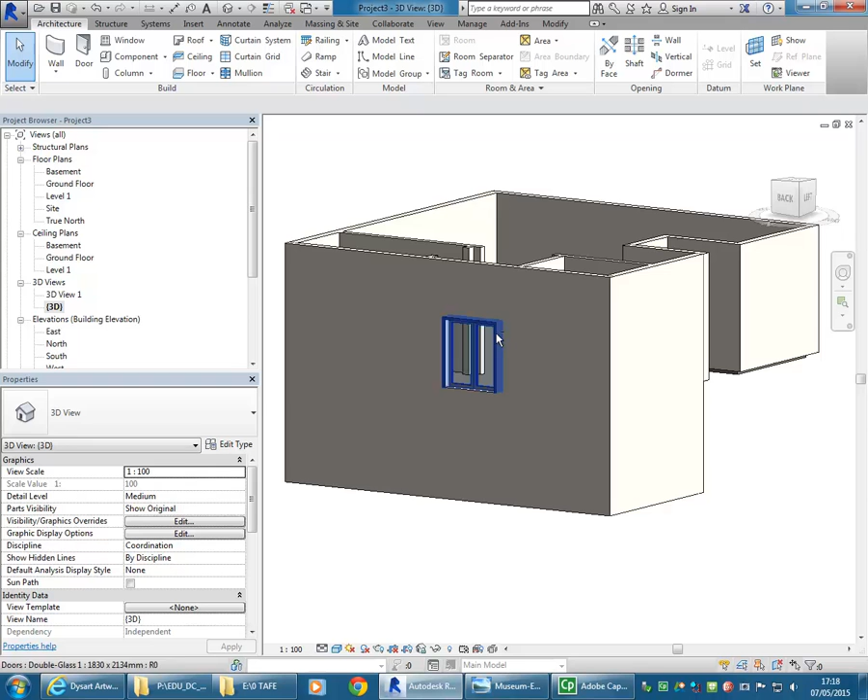I'll quickly put an entry in just to have something to relate to from the outside. Using the door tool, I'll go to load family, and in the doors folder we should have an entry door. It doesn't really matter which one you use, but I'll use the double glass for now. I'm just going to place that roughly in the centre of that entry area there.

Now looking at the building from the outside, we can see fairly clearly where the footpath should be, and that'll be part of our topo surface. You could actually use a floor for that as well - that's a common option, people use floors for lots of these ground surfaces, but it's still good to have a topo surface under it.

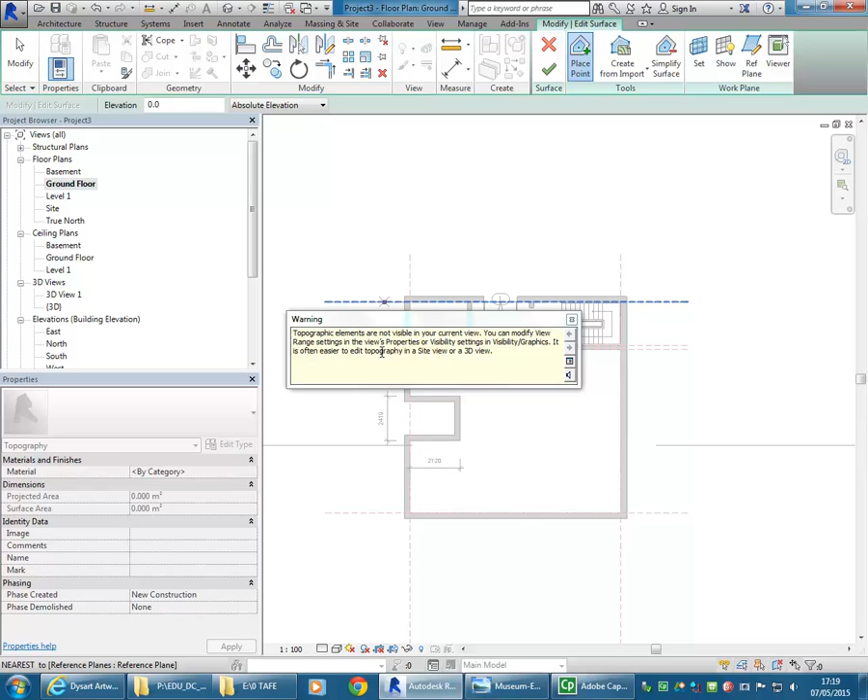Back in the ground floor plan, I'm going to go to the Massing and Site tab, where you'll find the topo surface tool. Now when you do that, you'll get a warning telling you you can't see topography in that view. That's okay, it's just a warning.

So I'm going to switch now to the site plan, where I will be able to see the topo surface. In your floor plans, make sure you're aware that you have a site floor plan already created for you.

Now to create my topo surface, I'm going to go back to place point up on the ribbon. Before I click anywhere, I'm going to change the elevation to -50, just so it's a little bit below the floor that I made. Then I'm going to zoom out so that I can see all of the elevation symbols.

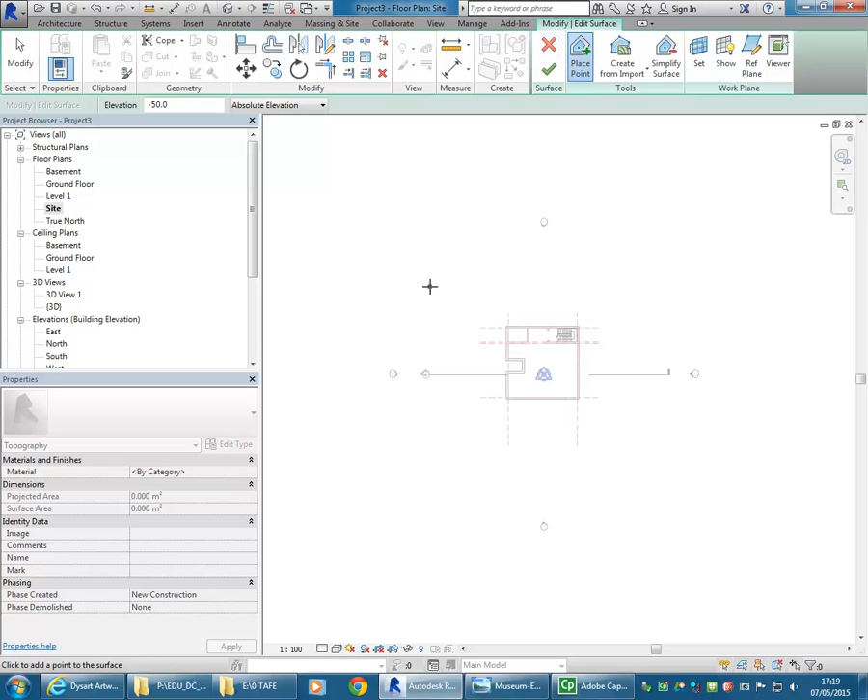Then I'm just going to click 4 points - 1, 2, 3, 4 - that are all outside of those north, south, east and west elevations. That's important because we want the elevations to show a ground line. And so that's it.

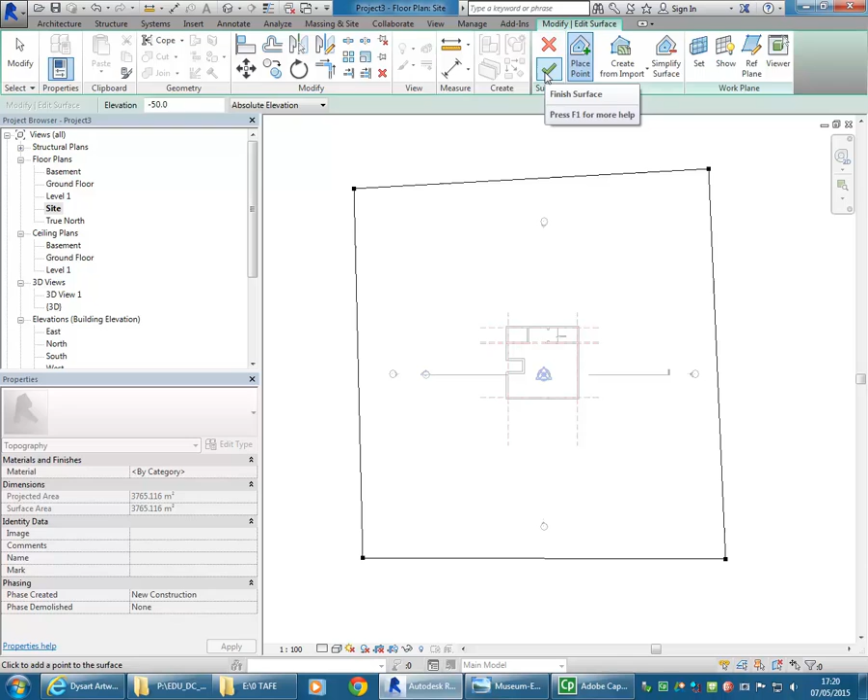I've made the topo surface. I'm going to tick to finish. Then I'm going to open up the section view, section 1, and show you there that it's made my topo surface.

We can see the ground line, but it's also put it through the level below, so I've got to do something extra to bring that level back. In the 3D view we can see as well what's happening.

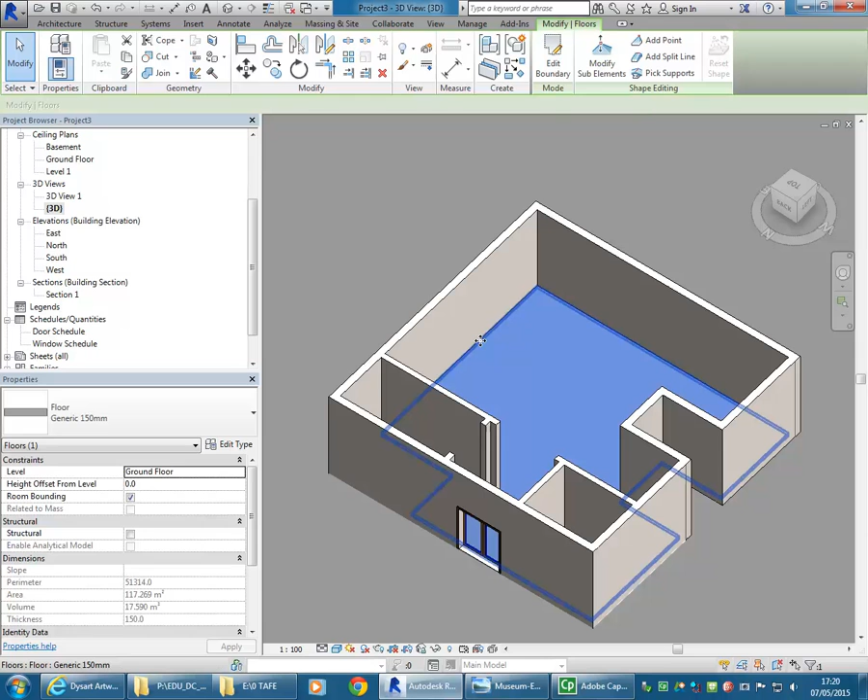It's maybe a little bit unclear because the floor on the inside is the same colour as the topo surface, so I'll make that a different colour. Just going to select that floor, edit type, and I'm going to quickly go in and assign a material to that.

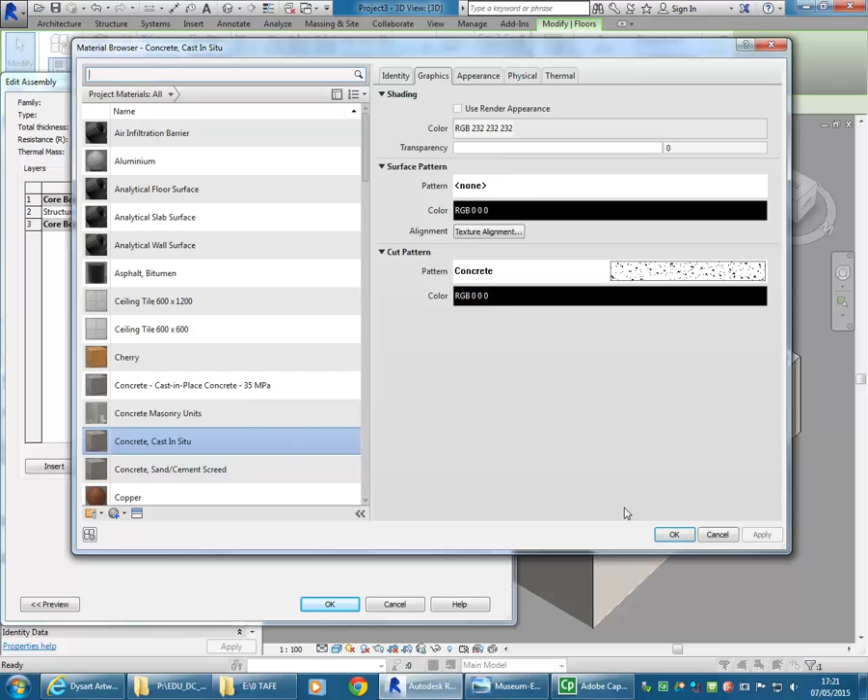I'll just see if the concrete cast in situ is - of course it's a similar grey, so I'll make it a little bit lighter, just to show you that the floor is showing up there and it's not the topo surface that we see inside the building.

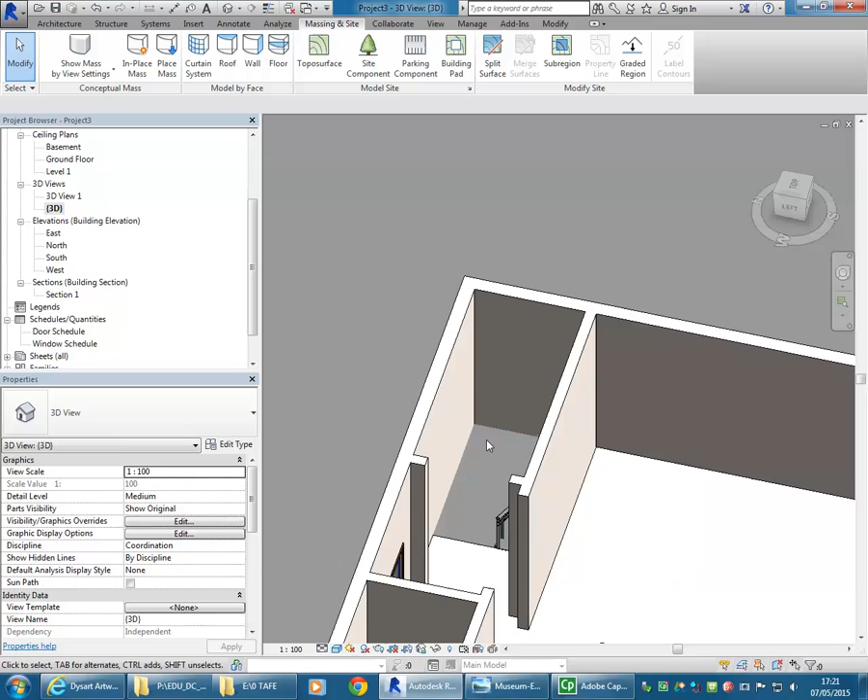But I can guarantee you that - well, you can see actually in the stairwell that the ground is going over that and flooding that entire basement level. So we've got to go now to the basement floor plan.

And you'll see also on the Massing and Site tab you have building pad. So just in the same area as topo surface, that building pad tool is kind of like a floor as well, so we can probably avoid having to add a floor for that level as well for now.

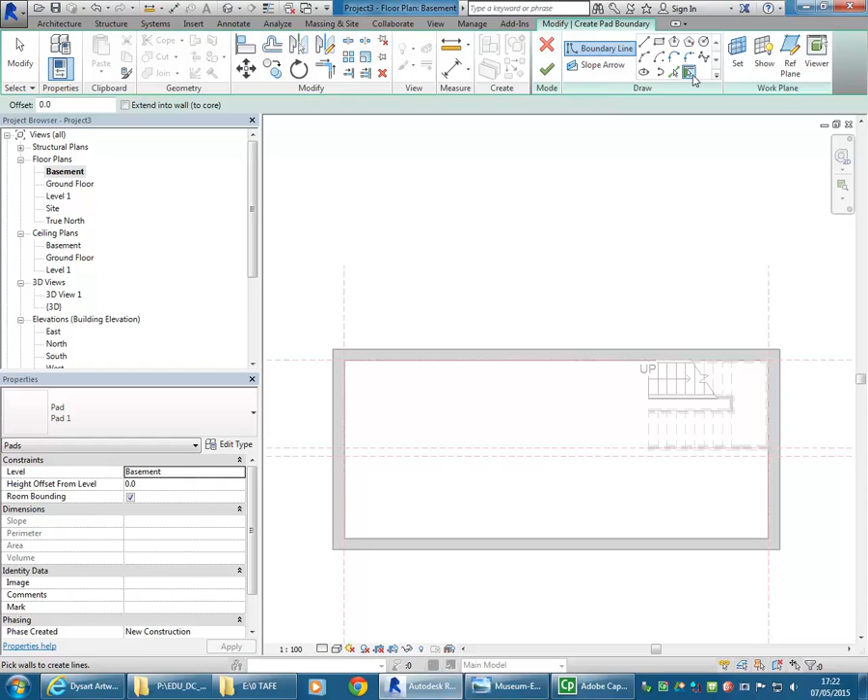So I'm just going to use the rectangle tool. I'm not going to worry about using pick wall - oh no, so I'll use pick walls. Sorry, so yeah, I'm leaving it on pick walls there in the draw panel, and I'm going to pick the outer edge of those 4 walls.

Tick to finish, and now back in my 3D view, you can see that it's showing that basement level again. And if I go into my section view, if it's in the right place, well, we can see the pad there.

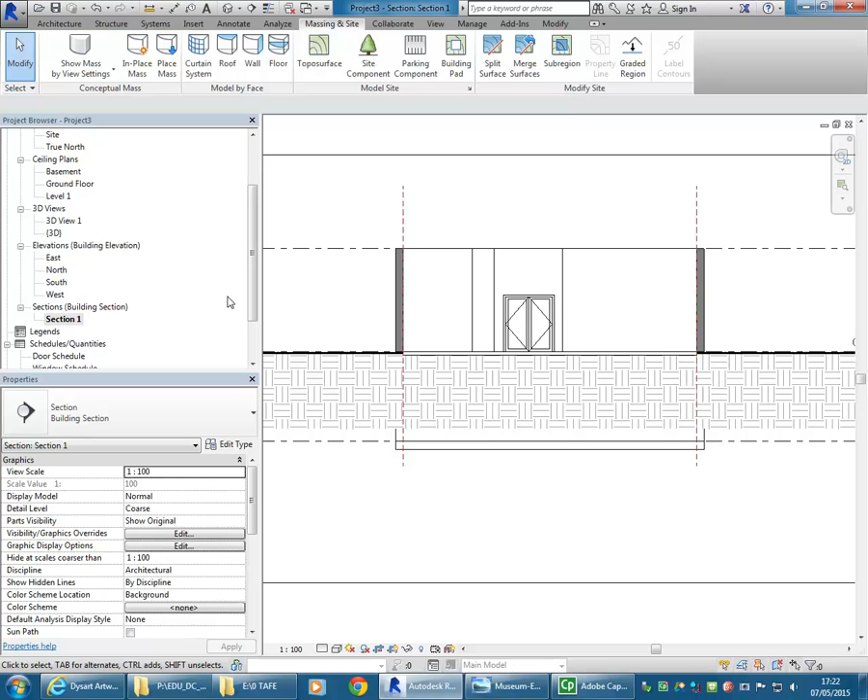But the section is not located all that well, so I'm going to move that section line in the floor plan up to the area where the stairs are, and I might flip it as well so that it's looking the other way.

Now back into section, and I can see really clearly the building pad, but there's still a couple of little things to tweak there, so I'm going to go pretty quickly through this, but you can always look back in the video.

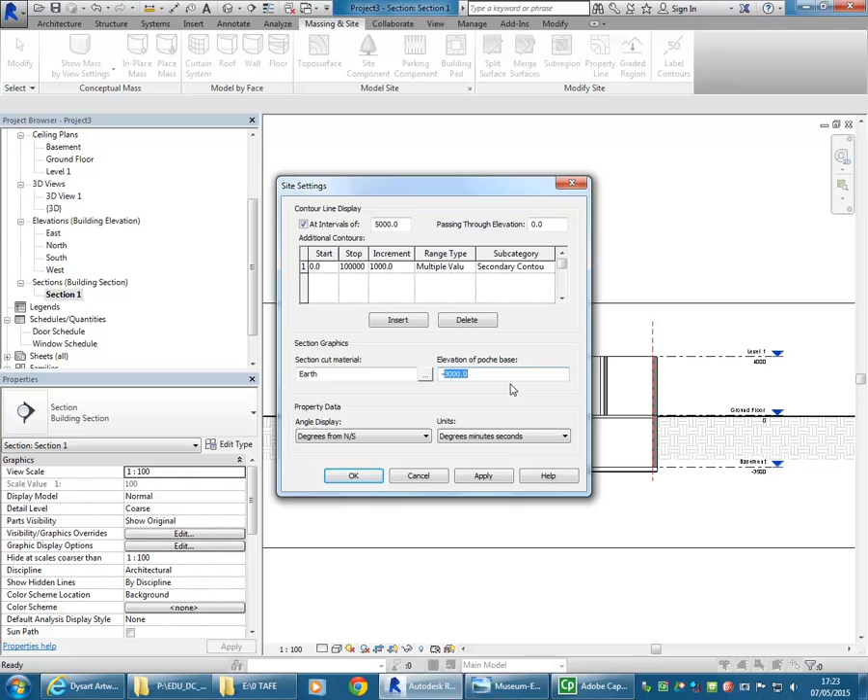The site settings live on that same massing and site panel. There's a little arrow you'll see at the bottom of that model site tab, and there I'm going to bring this elevation of Poche base down to -5,000. So that's brought my ground hatch down below that floor.

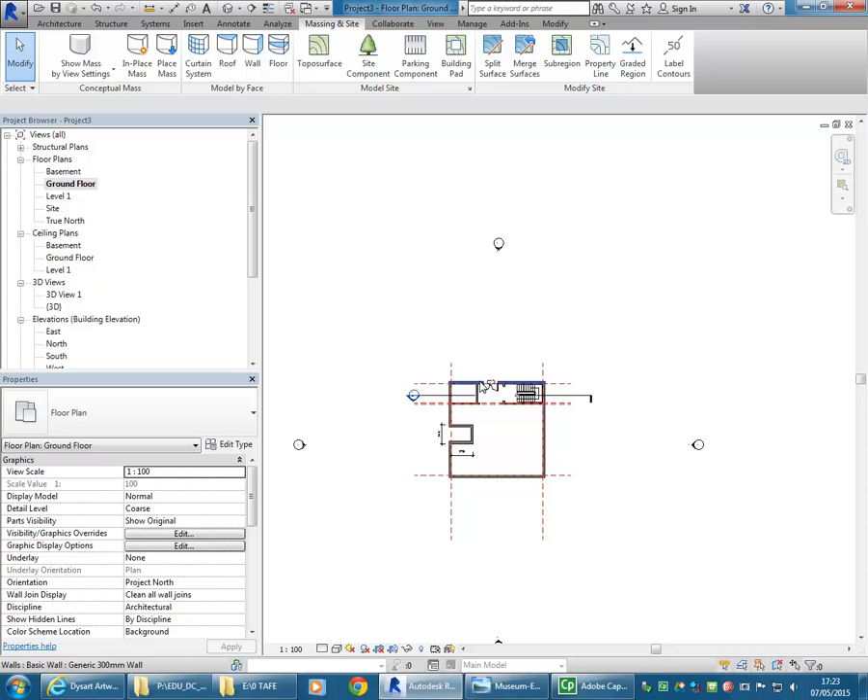Then another little tweak you can do is for the elevation views. So if you remember at the plan view, we can tell that the entry is on the north side. So I'm going to go to my north elevation, and we can see the entry, and that's going to be a useful view. Even though it's an interiors project, you'll still probably want to think about doing a view of that entry using the elevation.

But should elevations show the ground being cut like that? No, definitely not. You want a ground line, but you don't want the ground hatch. So you can turn that off just in this view by selecting it.

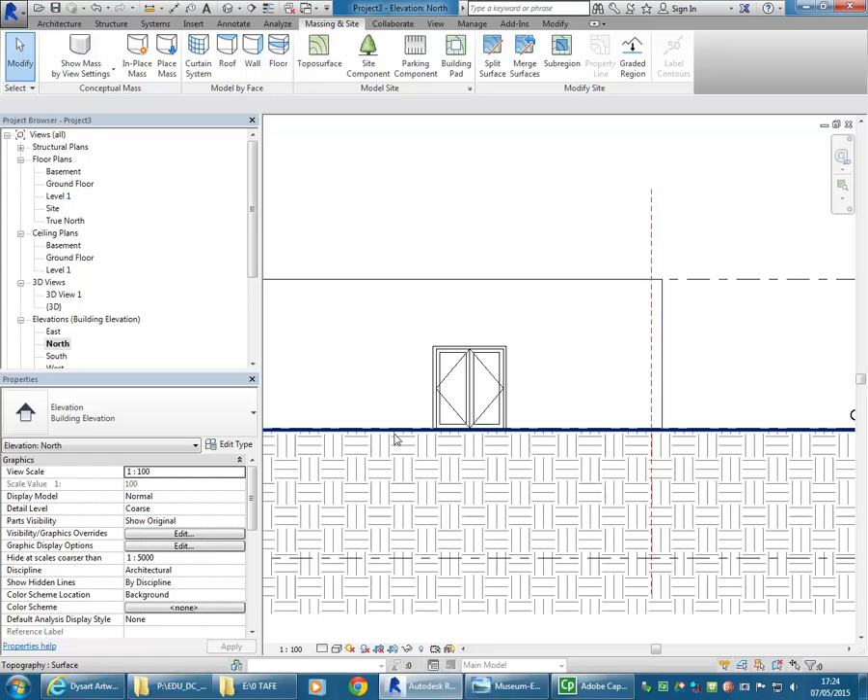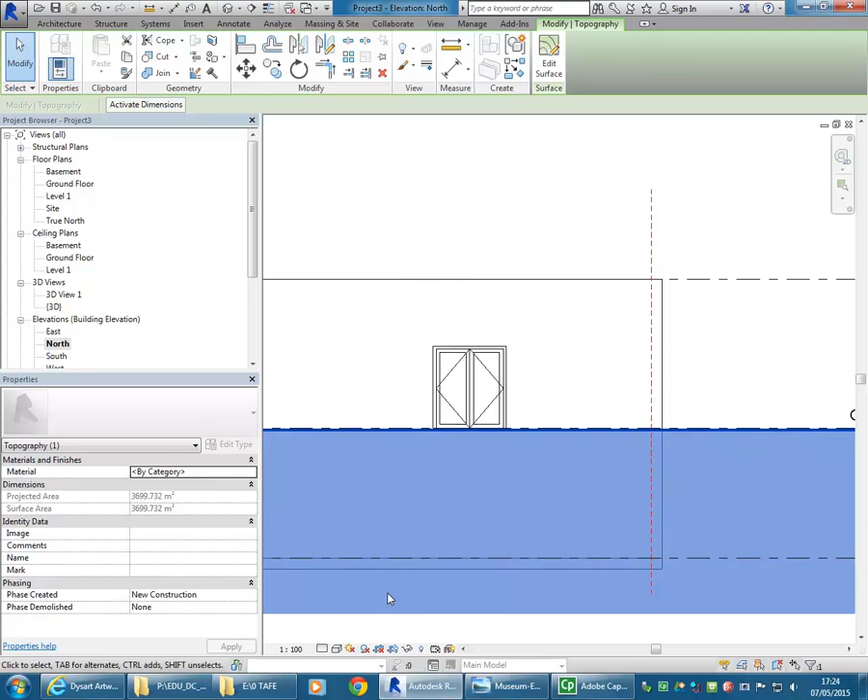Select the topo surface, right click, and then you can go to override graphics in view by element. And then if you go down to cut patterns, you can just turn that off, turn the visible option off, click OK, and it takes that hatch away and just leaves the ground line.

And then going into my 3D view there, we can see the topo surface, but if you orbit, you'll see that it's not showing any depth to it.

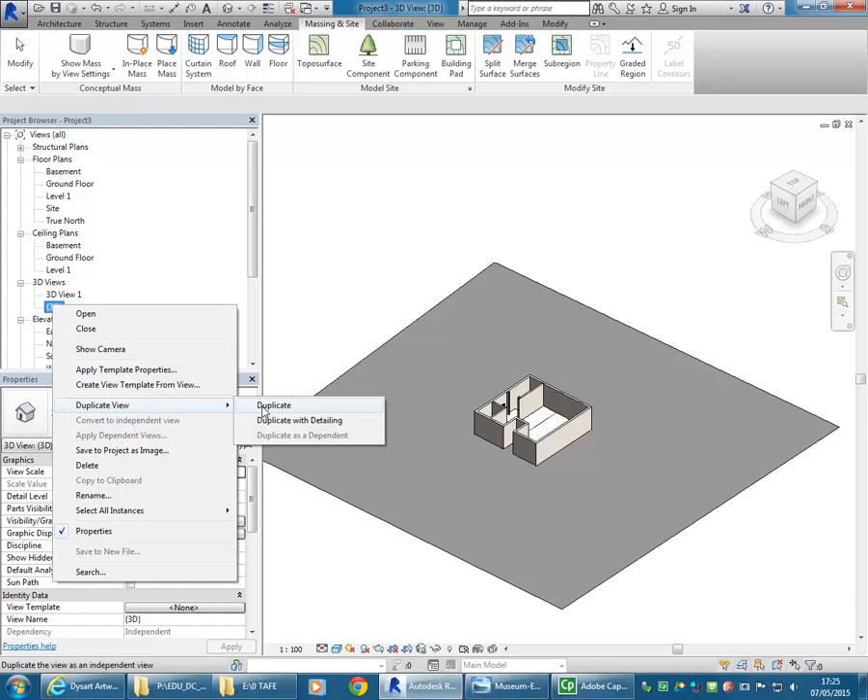Now it does have a depth, we saw that in the section, and so to get that to come up in the 3D view, firstly I'll duplicate this view just so that it's a new view, and I'll rename it section box 1.

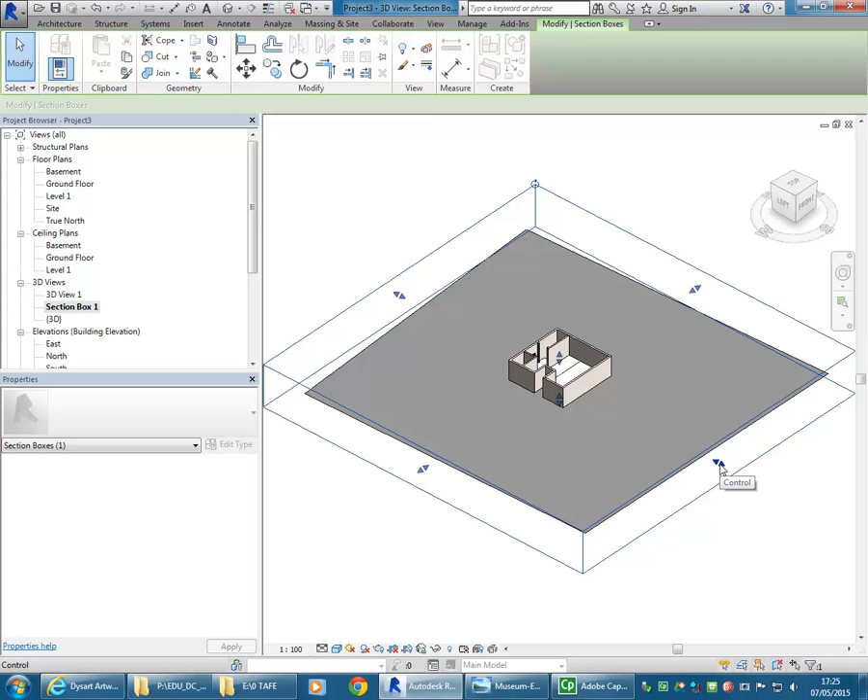And then in properties I'm going to turn on my section box. Either option will work for a 3D view. And then using the arrows on the side of this control box, I can bring that in, and notice how once you're cutting that ground surface, it's going to show you the ground hatch just like it does in the other views.

And so there I could even bring it back further so that we can see inside the building.

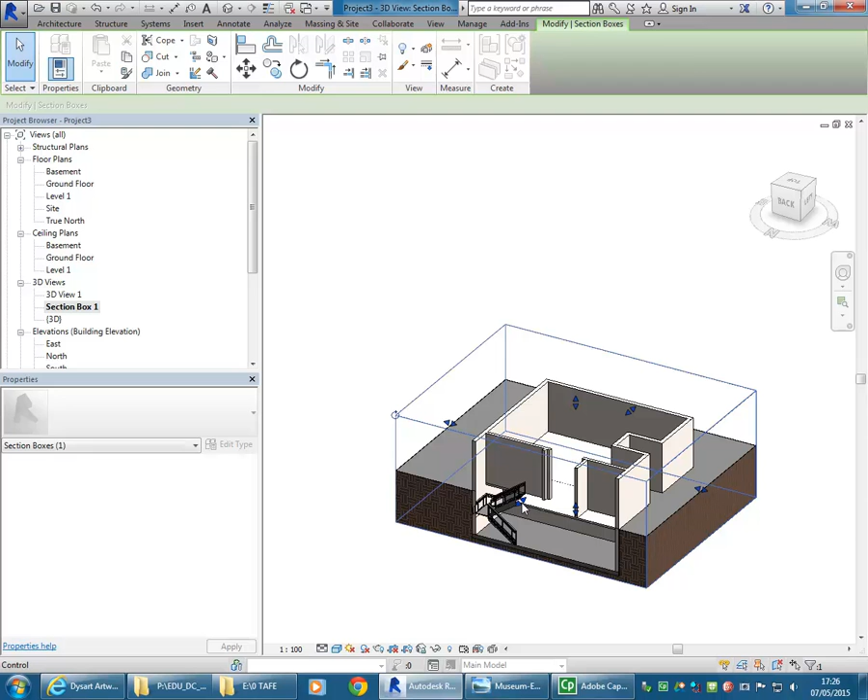And remember, section boxes can always be hidden just like anything else. When you right click, go to hide in view elements.

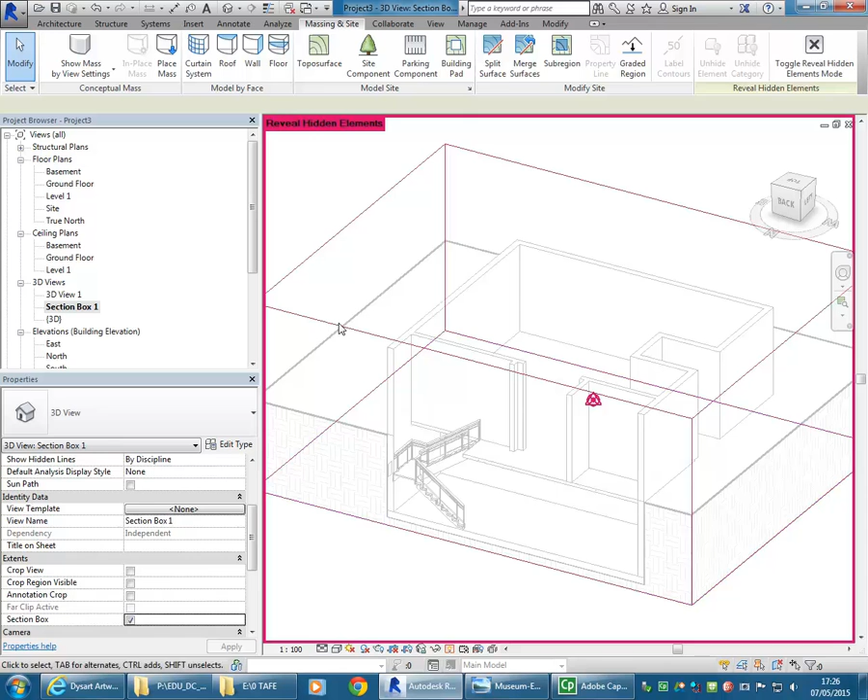Okay, so to access that again, you can click on the light bulb down the bottom and you can still manipulate it in that mode.

Alright, so oh no, that's gone a bit too far, so I'll actually just adjust that a bit further. There we go. So that'll be a useful view until I go and change my stair, and then I'll probably change that view.

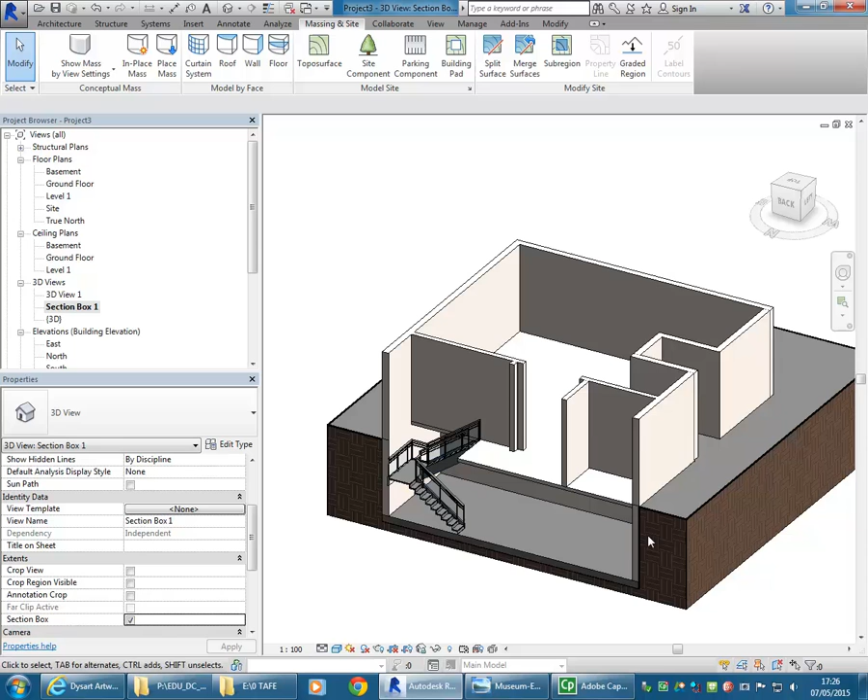So that should give you more than enough to be able to put your topo surface in, and later on we'll look at maybe what you can do if you want to add some detail and do a proper footpath.